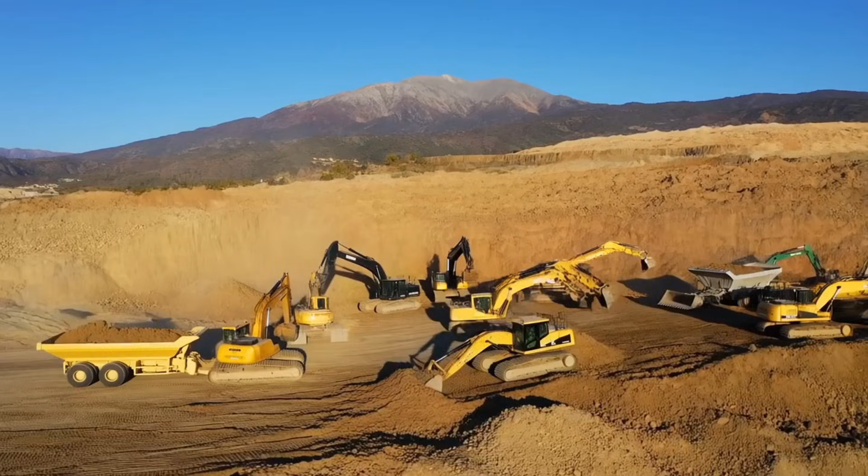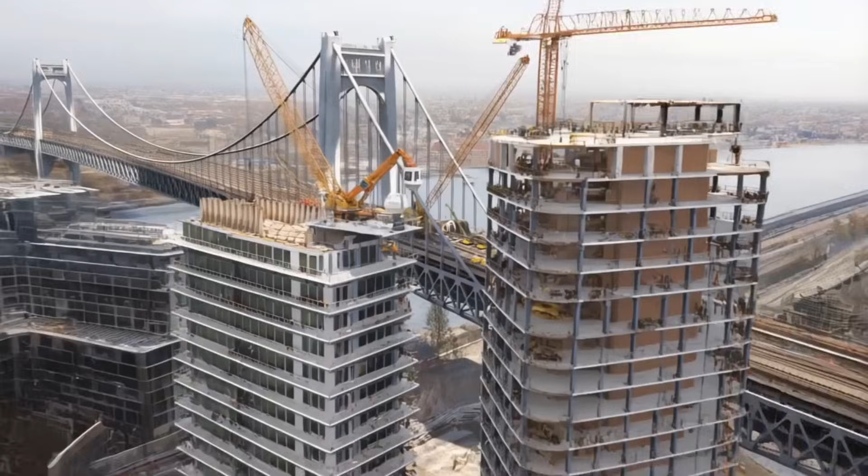Right now, someone is moving a mountain. Literally. And it's not even the craziest thing happening on this list. While you're watching this video, there are construction projects happening across the globe that make the pyramids look like a weekend DIY project. We're talking about structures so massive, so expensive, and so technically insane that they're redefining what humans can actually build. Some of them will change how entire continents trade. Fun times.

So buckle up. We're about to tour 8 mega projects that are either going to reshape civilization or become very, very expensive mistakes. Let's find out. Number 8.

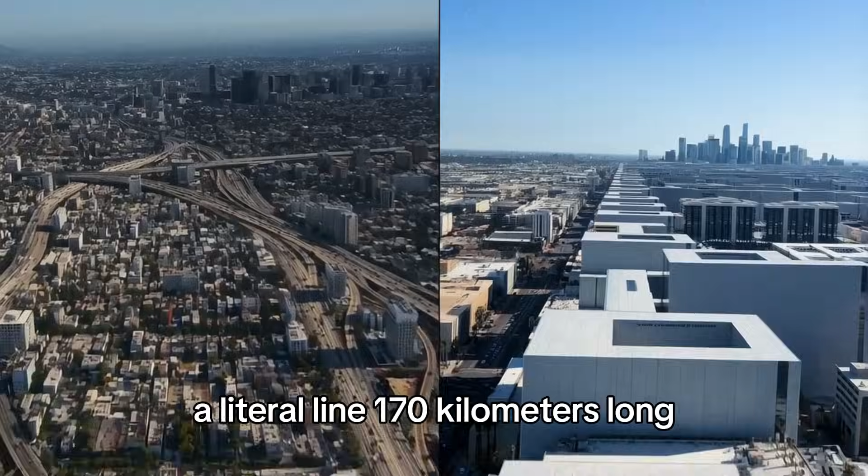Saudi Arabia. Imagine a city that's a straight line, not a sprawling mess like Los Angeles. A literal line, 170 kilometers long, 200 meters wide, and 500 meters tall. Two parallel mirrored skyscrapers running through the desert with everything you need sandwiched between them. That's the line. And yes, it sounds like someone pitched a concept from a sci-fi movie to a government with unlimited oil money.

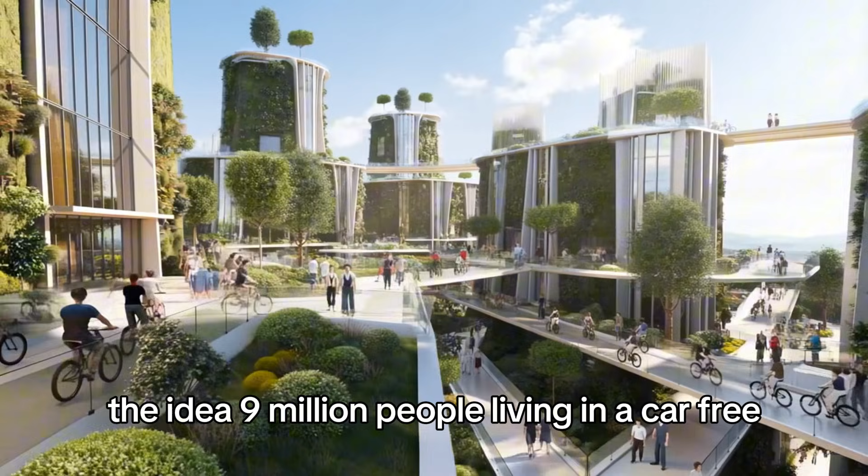Because that's basically what happened. Saudi Crown Prince Mohammed bin Salman unveiled this fever dream in 2021 as part of NEOM, his $500 billion attempt to diversify Saudi Arabia's economy away from oil. The idea? 9 million people living in a car-free, carbon-neutral megastructure where you can access everything you need within a 5-minute walk. High-speed rail underneath gets you from one end to the other in 20 minutes. The whole thing is powered by renewable energy and surrounded by nature reserves.

Sounds utopian, right? Here's where it gets wild. The line is being built in one of the harshest deserts on Earth, where summer temperatures regularly hit 45 degrees Celsius. The mirrored exterior is supposed to reflect heat, but engineers are basically asking, what could possibly go wrong with two 170-kilometer-long mirrors in the desert?

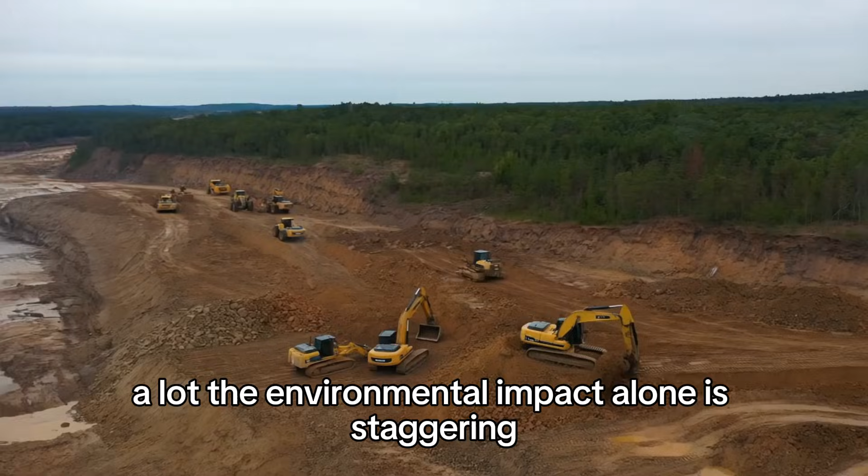Spoiler alert, a lot. The environmental impact alone is staggering. They're not building around the landscape, they're cutting straight through it. Mountains are being demolished, entire ecosystems are being relocated. And the local Howeitat tribe, let's just say their relocation hasn't been exactly voluntary. Human rights groups are having a field day with this one.

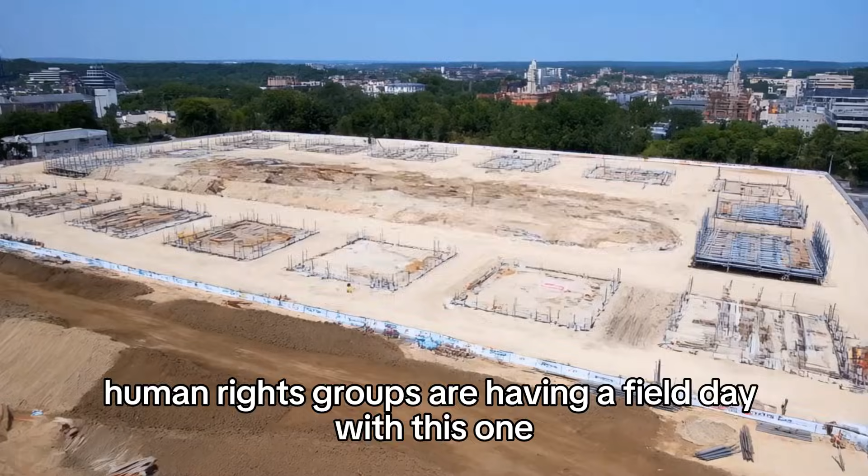Construction started in 2021, and they're aiming for the first section to be complete by 2030. That's right, they want to build a 170-kilometer-long vertical city in less than a decade. For context, it took New York City about 400 years to get to its current state. The line wants to do it in 9.

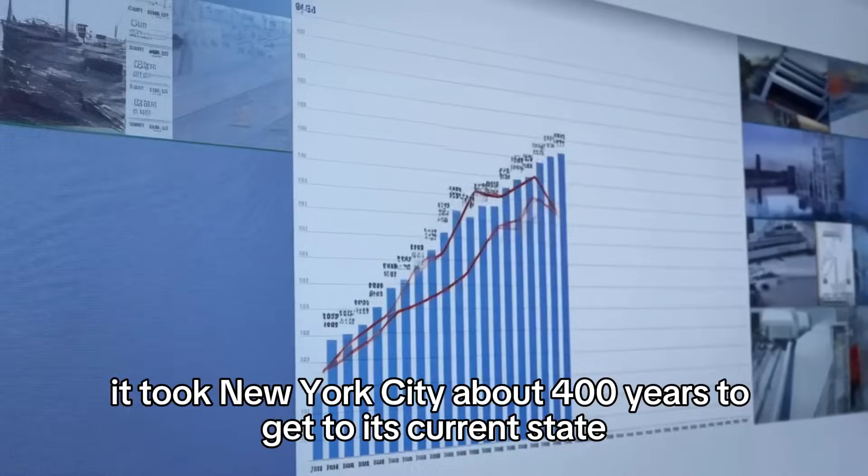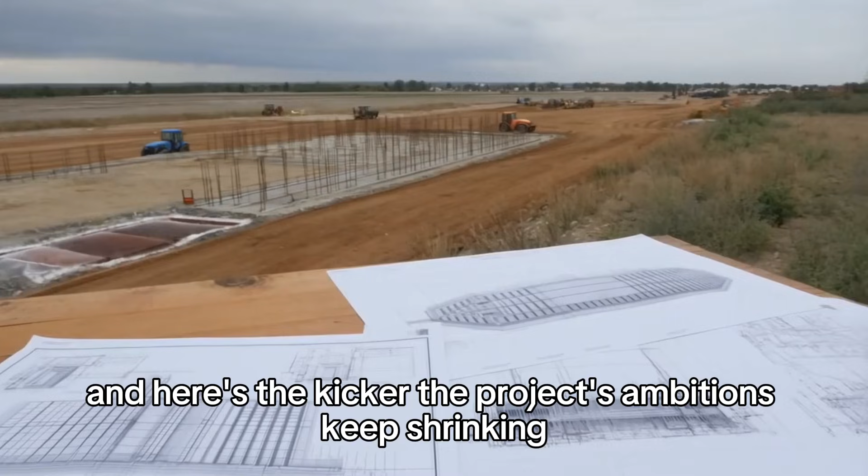The budget keeps climbing. Originally $500 billion, some estimates now put it closer to $1 trillion. That's more than the GDP of most countries. And here's the kicker, the project's ambitions keep shrinking. Recent reports suggest they might only complete 2.4 kilometers by 2030, not the full 170. That's like promising someone a Ferrari and delivering a skateboard.

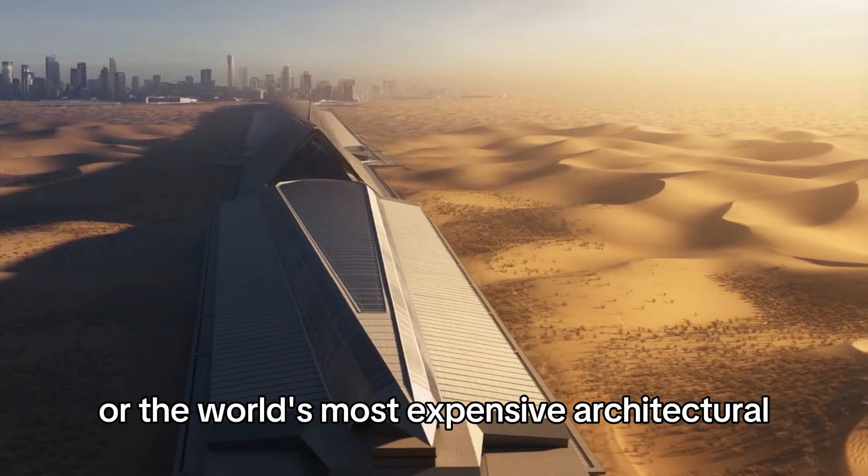Will it work? Ask me in 2030. The line is either the future of urban living or the world's most expensive architectural middle finger to common sense.

Number 7. The Grand Ethiopian Renaissance Dam. Let's head to Africa, where Ethiopia is building what will become the largest hydroelectric dam on the entire continent. The Grand Ethiopian Renaissance Dam, or GERD, sits on the Blue Nile in northwest Ethiopia. When it's finished, this thing will generate 5,150 megawatts of electricity. That's enough to power about 5 million homes.

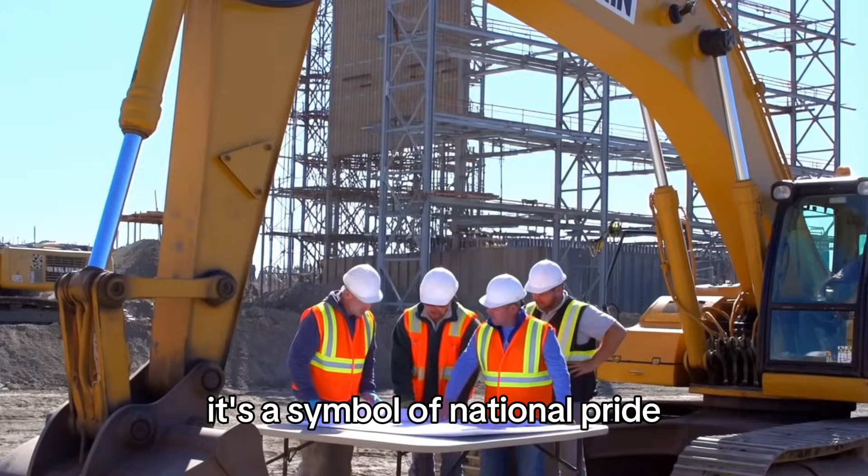For Ethiopia, this is huge, literally and figuratively. Around 44% of Ethiopia's population doesn't have electricity. This dam could change that. It's a symbol of national pride, economic development, and energy independence. They're building it with their own money, about $4.8 billion, making it one of the few mega projects in Africa that isn't drowning in foreign debt.

But here's where things get spicy. The dam sits on the Blue Nile, which eventually flows into Egypt. And Egypt is not happy about this. Like, really not happy. The Blue Nile provides about 85% of Egypt's water supply. So when Ethiopia started filling the dam's reservoir in 2020, essentially reducing downstream flow, Cairo went into panic mode.

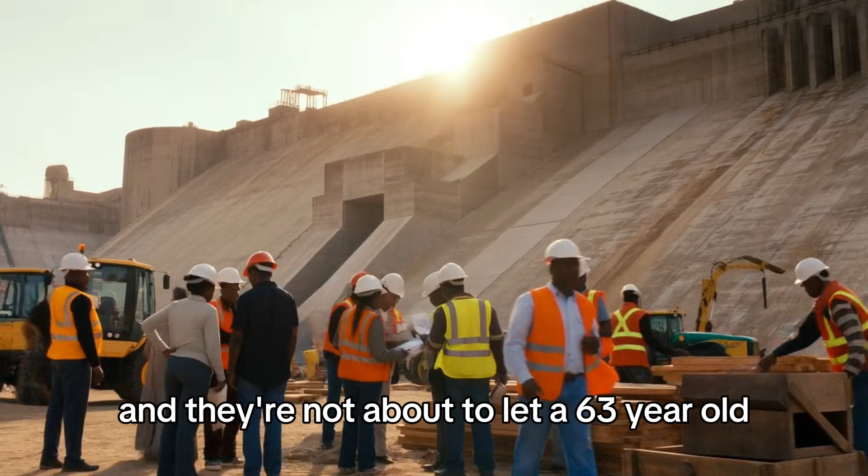Egypt's position is simple. They've had water rights to the Nile since a 1959 agreement with Sudan. Any major project on the Nile needs their approval. Ethiopia's position is equally simple. That 1959 agreement was made when they were never consulted, and they're not about to let a 63-year-old colonial-era treaty dictate their development. Sudan is caught in the middle, sometimes supporting Ethiopia, sometimes siding with Egypt, mostly just hoping nobody decides to solve this with tanks.

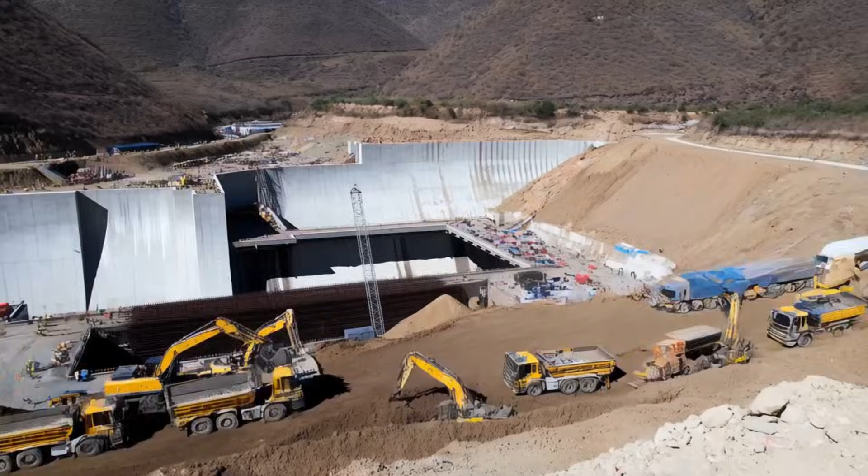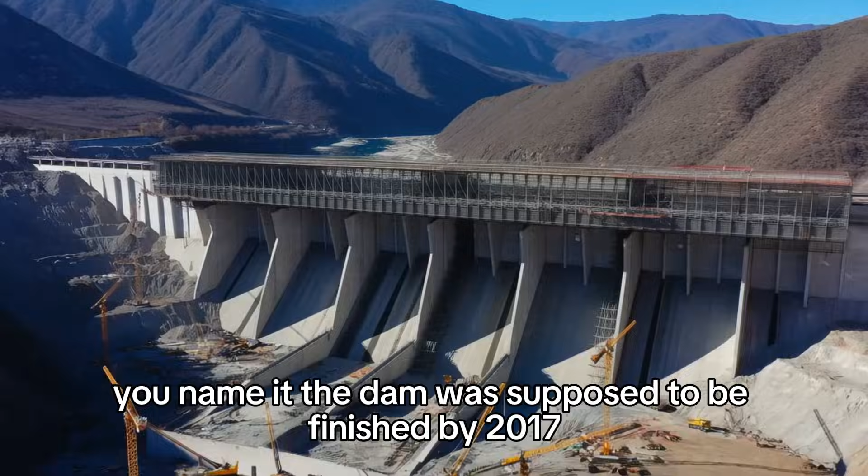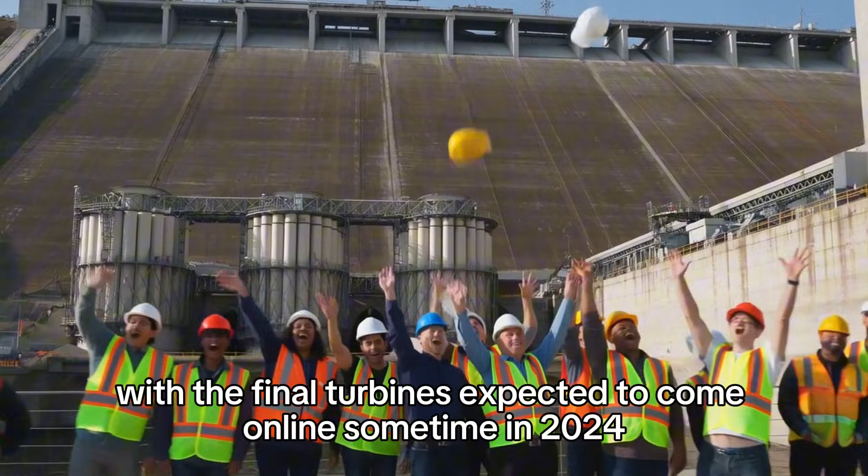Construction started in 2011 and has faced every obstacle imaginable: technical delays, political disputes, assassination attempts on engineers, you name it. The dam was supposed to be finished by 2017, then 2023. As of now, it's about 95% complete, with the final turbines expected to come online sometime in 2024 or 2025. Maybe. Possibly. If everyone plays nice.

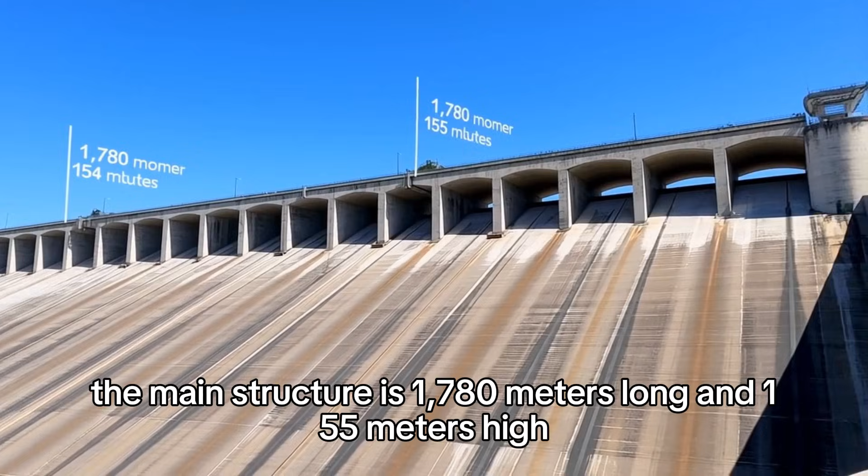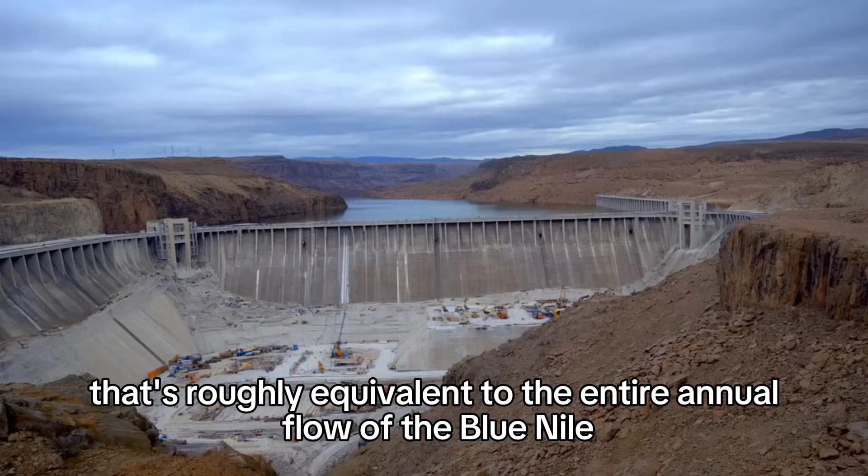The dam itself is massive. The main structure is 1,780 meters long and 155 meters high. The reservoir behind it, when full, will hold 74 billion cubic meters of water. That's roughly equivalent to the entire annual flow of the Blue Nile. Filling it takes 3 to 7 years, depending on who you ask and how much they want to terrify downstream neighbors.

The international community is watching this closely because GERD could set a precedent. If Ethiopia succeeds in asserting its water rights over colonial-era treaties, other upstream nations might get ideas. There are 11 countries that share the Nile Basin. Things could get complicated fast.

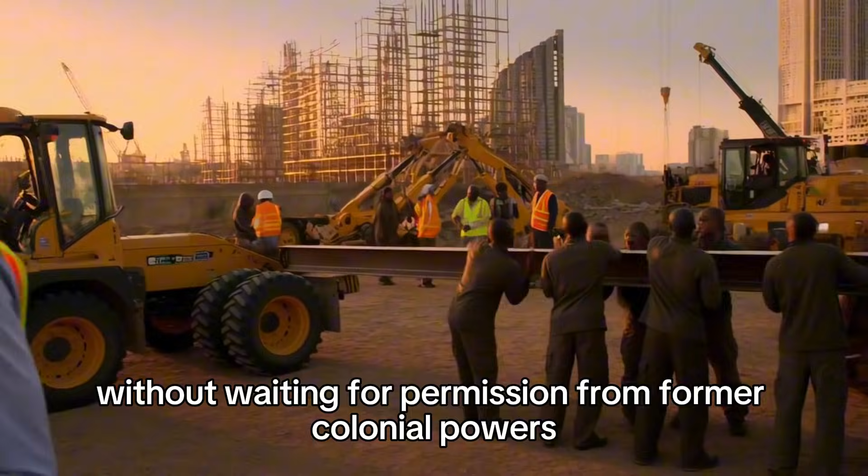But for Ethiopia, this isn't just about electricity. It's about sovereignty, dignity, and proving that African nations can build world-class infrastructure without waiting for permission from former colonial powers. Whether that message comes at the cost of regional stability is the multi-billion-dollar question.

Number 6. Istanbul Grand Airport. Turkey decided that having one of the world's busiest airports wasn't enough. So they built a new one. And they didn't just build a new airport. They built the airport. The one that makes other airports look like regional bus stations.

Istanbul Grand Airport, also called Istanbul Airport, because apparently Grand was too humble, opened in 2018, but is still under construction. This beast will have 6 runways and handle 200 million passengers a year. To put that in perspective, Atlanta's Hartsfield-Jackson, currently the world's busiest airport, handles about 107 million passengers. Istanbul wants to almost double that.

The airport sits on the European side of Istanbul, about 35 kilometers north of the city center. The location was chosen specifically because Turkey wants to be the global hub connecting Europe, Asia, and Africa. Istanbul's geographic position is perfect for this. You can fly from here to anywhere in the world, and most of those destinations are within a few hours.

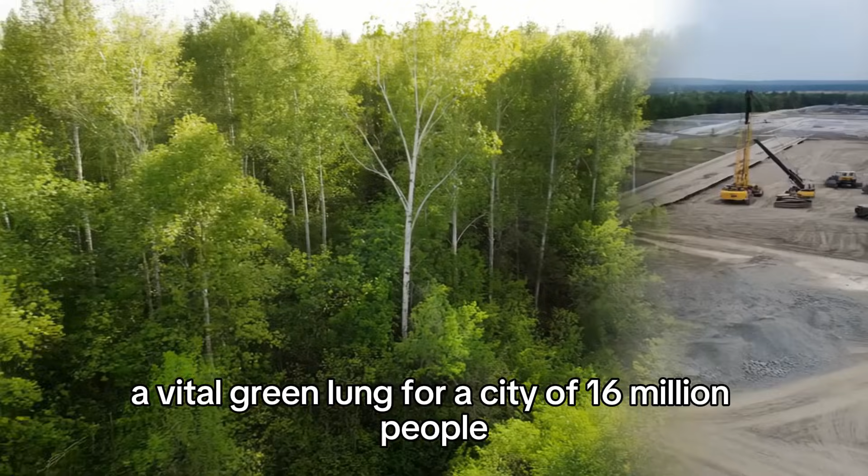But building this required some serious geographical gymnastics. The northern forests of Istanbul, a vital green lung for a city of 16 million people, got turned into tarmac and terminals. Environmentalists were not pleased. Protests erupted. The government responded with the construction equivalent of too late now.

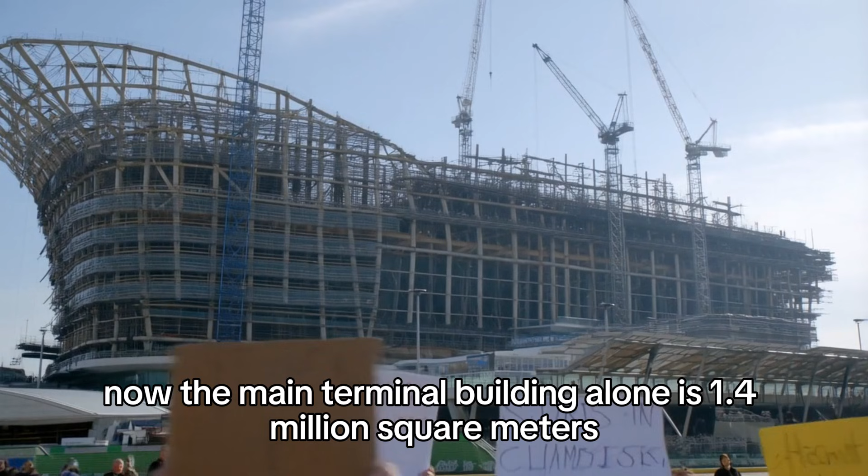The main terminal building alone is 1.4 million square meters. That's bigger than any other airport terminal in the world. It's so big that they had to build an internal train system just to get passengers from one end to the other. Walking from the farthest gate to the exit could take 30 minutes.

Pack snacks. Turkey invested about $12 billion into this project, which sounds like a lot, until you realize they're expecting it to contribute $50 billion annually to the Turkish economy once fully operational. The logic is simple. Control the travel hub.

Control the money. Dubai did it. Singapore did it. Turkey wants in on that action. Here's the weird part. Istanbul already had 2 perfectly functional international airports, Ataturk and Sabiha Gökçen. Ataturk Airport, which was one of Europe's busiest, got shut down when Istanbul Grand Airport opened. Just closed. Now it mostly sits empty, a monument to the phrase go big or go home.

The airport also features some truly bonkers amenities. There's a museum, a library, prayer rooms for multiple religions, sleeping pods, a health clinic, and enough shopping to make Dubai Mall jealous. It's less an airport and more a small city that happens to have runways attached.

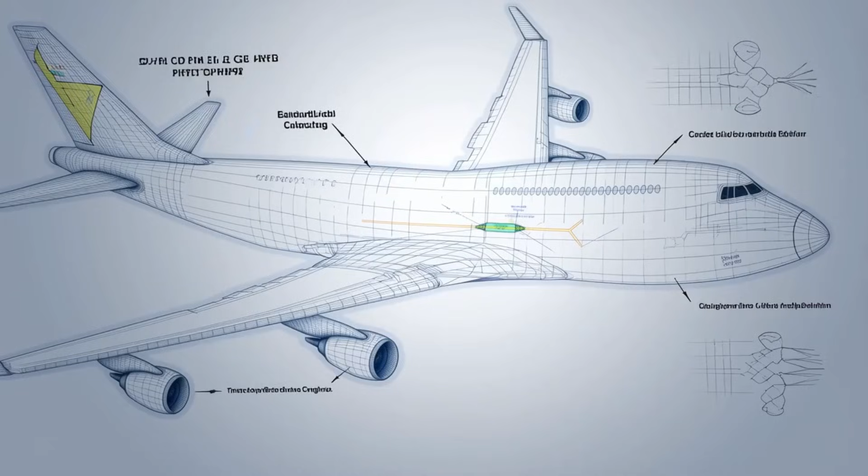Will it hit 200 million passengers? That depends on whether Turkey can maintain political stability, keep its economy from imploding, and convince airlines that Istanbul is the place to route everything. The first 2 are question marks. The third is looking promising.

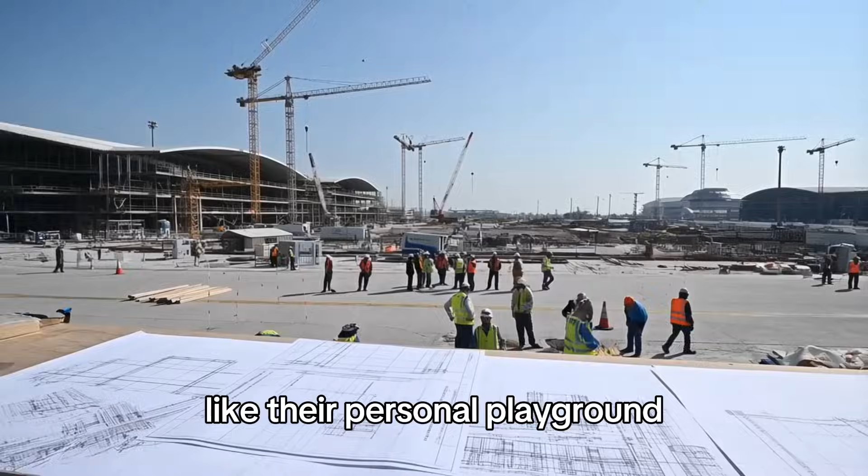Turkish Airlines is already one of the world's largest carriers, and they're treating Istanbul Grand Airport like their personal playground. Construction continues on the remaining phases, with the full build-out scheduled for 2028. If it works, Turkey becomes the undisputed travel hub of the Eastern Hemisphere.

If it doesn't, they've got a really big empty building in the middle of what used to be a forest.

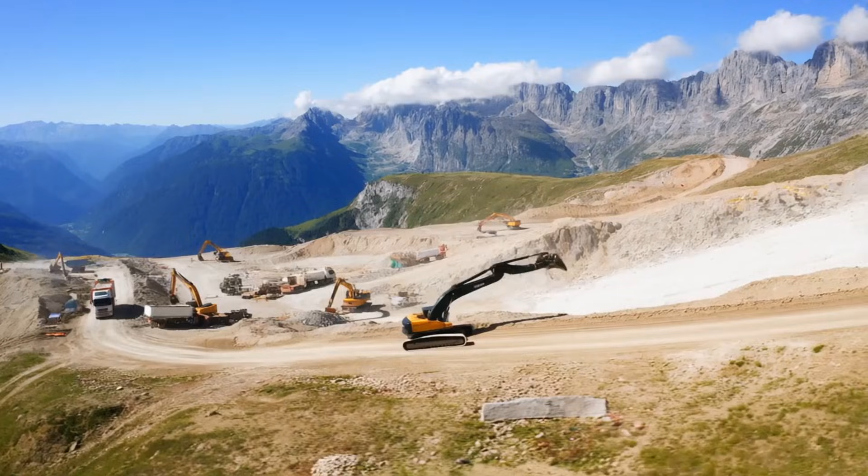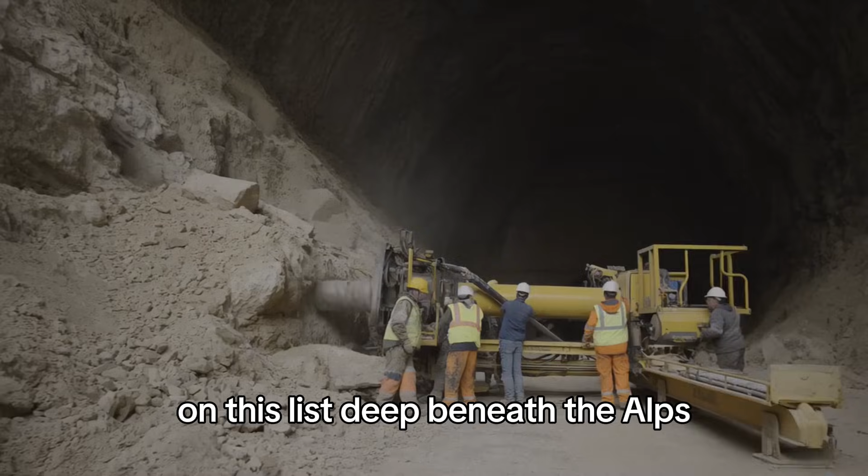Number 5, Brenner Base Tunnel, Austria and Italy. It might actually be the most impressive feat of engineering on this list. Deep beneath the Alps, Austria and Italy are drilling the world's longest underground railway tunnel. The Brenner Base Tunnel will run for 64 kilometers straight through the mountains, connecting Innsbruck, Austria with Fortezza, Italy. Assuming they don't hit any more underground lakes or Roman ruins, it will be the longest railway tunnel in the world, beating out the current champion, Switzerland's Gotthard Base Tunnel, by about 7 kilometers.

Here's why this matters. Right now, about 2.5 million trucks cross the Alps every year, mostly through the Brenner Pass, which is the lowest and easiest crossing point. Those trucks create traffic nightmares, spew pollution into pristine alpine air, and occasionally cause accidents that shut down the entire route. The tunnel will shift most of that freight onto trains, cutting transit times and emissions.

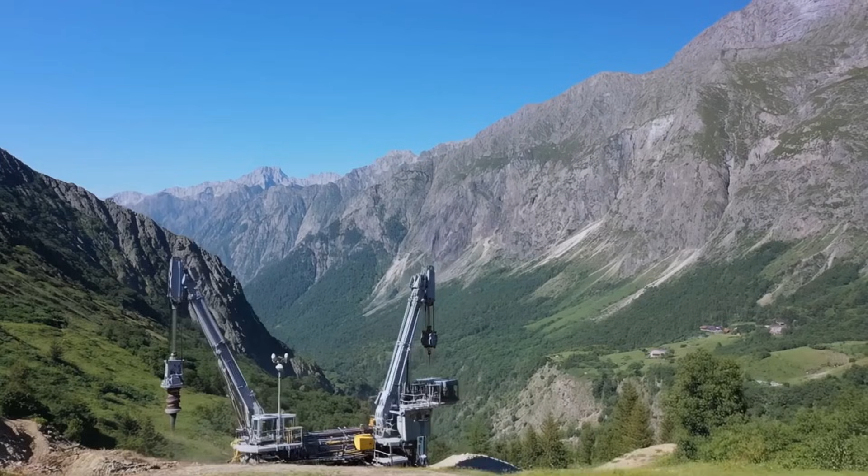But drilling through mountains is hard. Really hard. The Alps are geologically complicated, a messy collision zone where the African and European tectonic plates are still shoving into each other. That means unpredictable rock formations, underground water sources, and constant risk of cave-ins.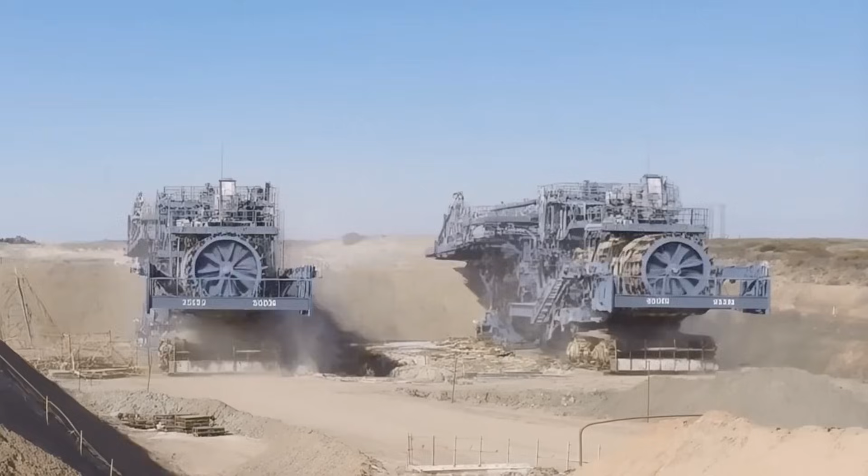They started drilling in 2007. Two massive tunnel boring machines, affectionately named after saints, because if you're drilling through a mountain, you need all the divine help you can get, are working from both ends. They meet in the middle. Hopefully. If the math is wrong, they'll have two tunnels that miss each other, which would be embarrassing and expensive.

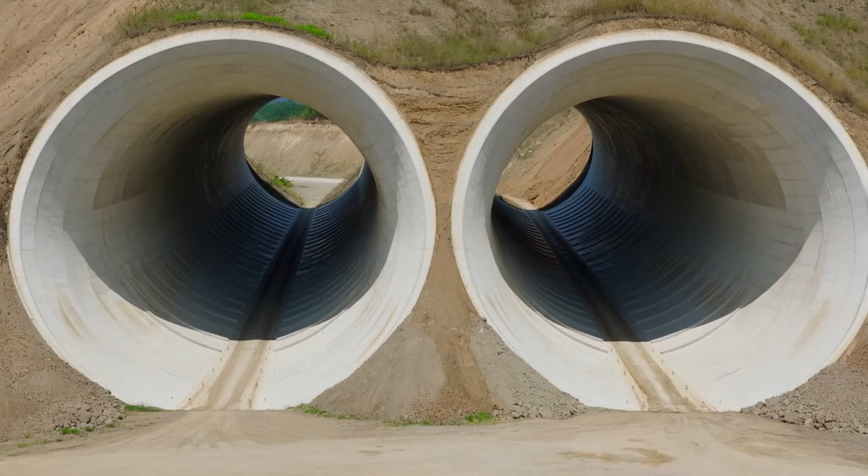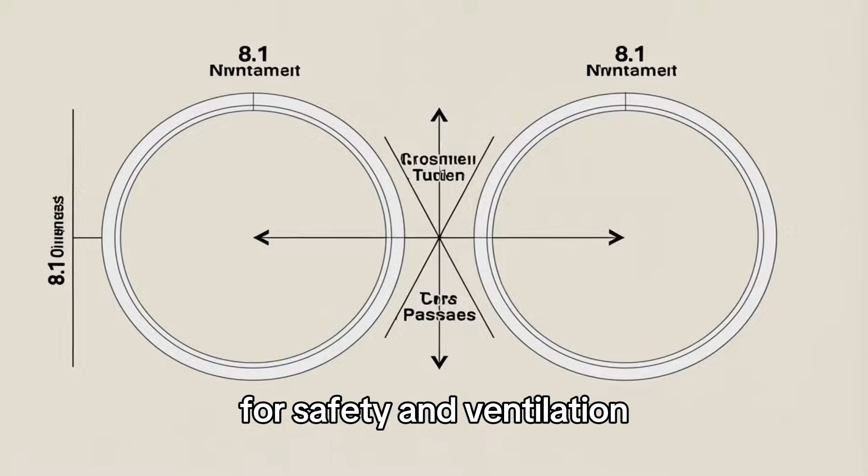The tunnel isn't just one tube. It's actually two parallel tunnels, each 8.1 meters in diameter, connected every 333 meters by cross passages for safety and ventilation. There's also a smaller exploratory tunnel that runs alongside, used for drainage and maintenance. In total, they're excavating about 230 kilometers of underground space.

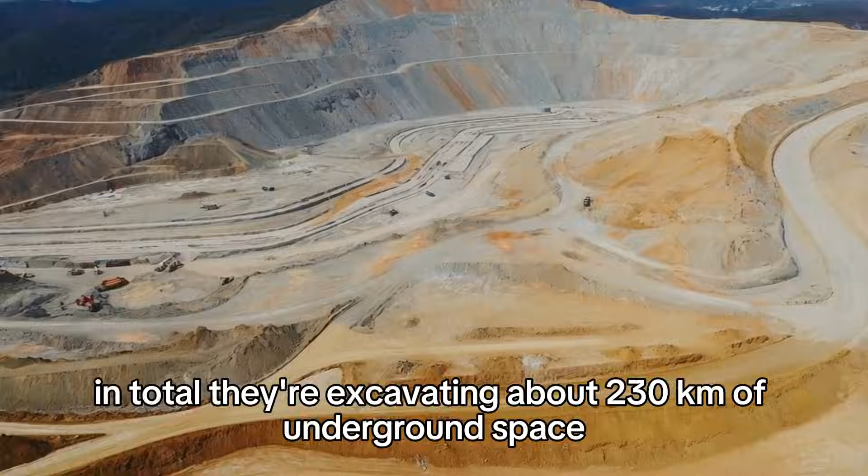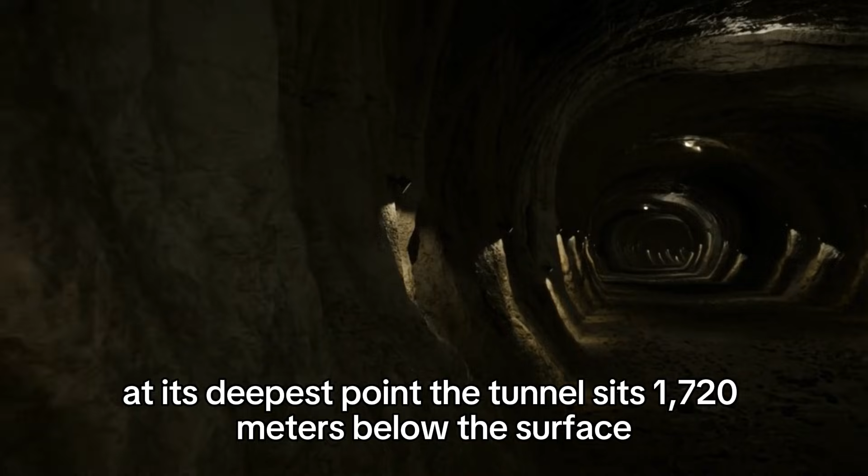The cost? Around 10 billion euros, split between Austria and Italy. That's surprisingly reasonable for a project of this scale, mainly because both countries are really motivated to stop having trucks destroy their mountains. At its deepest point, the tunnel sits 1,720 meters below the surface. The rock pressure at that depth is enormous. The temperature can hit 40 degrees Celsius. Workers have to deal with heat, dust, and the knowledge that millions of tons of mountain are sitting above their heads. It's not a job for the claustrophobic.

Water is a constant enemy. The Alps are full of underground aquifers, and hitting one while drilling can flood the tunnel in minutes. In 2011, they struck a massive water source that delayed construction by 2 years. The water table in some alpine villages dropped noticeably because the tunnel was accidentally draining their groundwater. Oops! But the tunnel is also a masterpiece of precision.

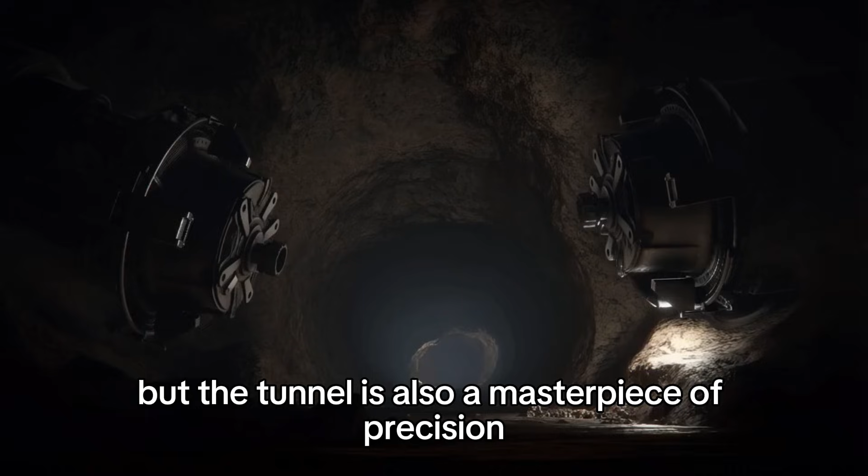When the two boring machines finally meet in the middle, they need to line up within a few centimeters. Considering they're drilling blind through dozens of kilometers of rock, that's like threading a needle while blindfolded and wearing oven mitts.

Environmental groups love this project, which is rare for mega infrastructure. Moving freight from trucks to trains will cut CO2 emissions by about 60%. The Alps will get quieter, air quality will improve. Wildlife corridors will be less disrupted. It's one of the few mega projects where environmentalists and engineers actually agree.

When it opens in 2032, trains will zip through the Alps at up to 250 kilometers per hour. The journey from Munich to Verona will take 2 hours instead of 5. And the Brenner Pass, which has been the main route through the Alps for literally thousands of years, will finally get a break.

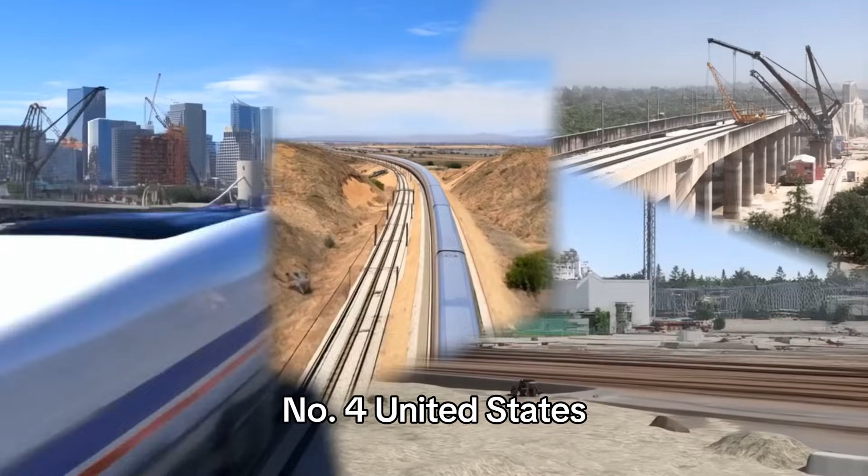Number 4, United States. Speaking of trains, let's talk about the train project that refuses to die, no matter how hard America tries to kill it. If it ever gets built, it'll connect San Francisco to Los Angeles, with trains running at 350 kilometers per hour. The trip will take under 3 hours, compared to the current 6-hour drive or 1-hour flight, plus 2 hours of airport security theater.

This is supposed to be America's answer to Japan's Shinkansen or France's TGV, a modern, sleek, high-speed rail system that proves the US can still build big infrastructure. Except it's been an absolute disaster from day one.

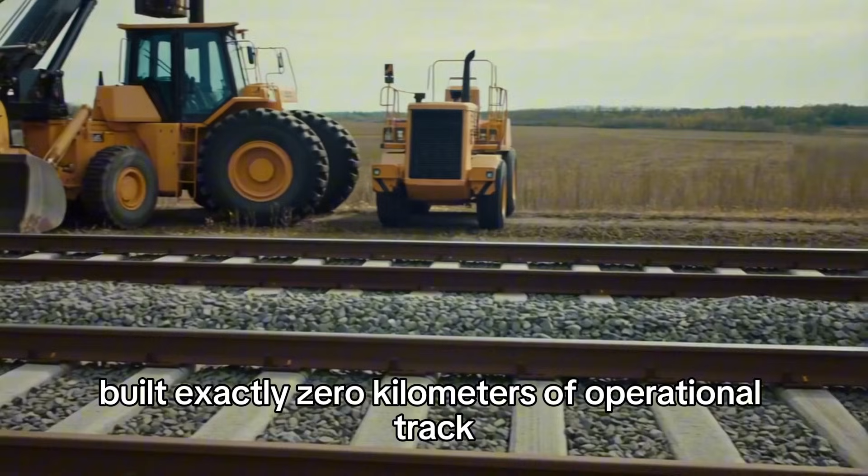Construction started in 2015. The original budget was $33 billion. The estimated completion date was 2020. As of 2024, they've spent over $10 billion, built exactly 0 kilometers of operational track, and the new cost estimate is somewhere between $90 and $128 billion, depending on who's doing the math and how much they're trying to sugarcoat it.

Here's what went wrong. Everything. The route planning was a political nightmare, with every city demanding the train stop at their town, turning a simple San Francisco to Los Angeles route into a zigzagging mess. Land acquisition became a legal quagmire, with property owners suing left and right.

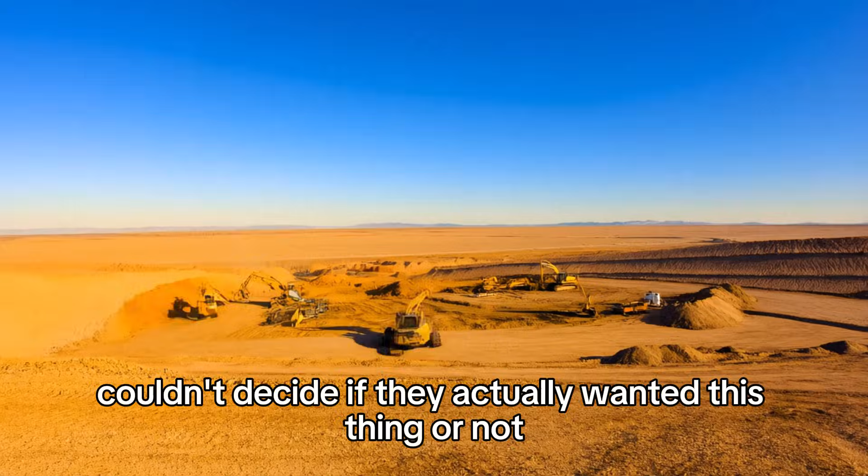Environmental reviews took years. Labor costs exploded, and California's political establishment couldn't decide if they actually wanted this thing or not. The current plan is to build a scaled-back initial segment in the Central Valley, connecting Merced to Bakersfield. Let me repeat that. They're spending billions of dollars to connect two cities that nobody needs to travel between at high speed.

It's like building a Ferrari that only drives in your driveway. The idea is that once this segment is operational, it'll prove the concept works, and funding will magically appear to extend it to San Francisco and Los Angeles. That's optimistic. That's California lottery winner levels of optimistic.

If California can pull this off, it would be transformative. Los Angeles to San Francisco is one of the most traveled routes in America. About 40 million trips happen on that corridor every year. A functional high-speed rail system could take thousands of cars off the road, reduce emissions, and create a model for other U.S. cities to follow.

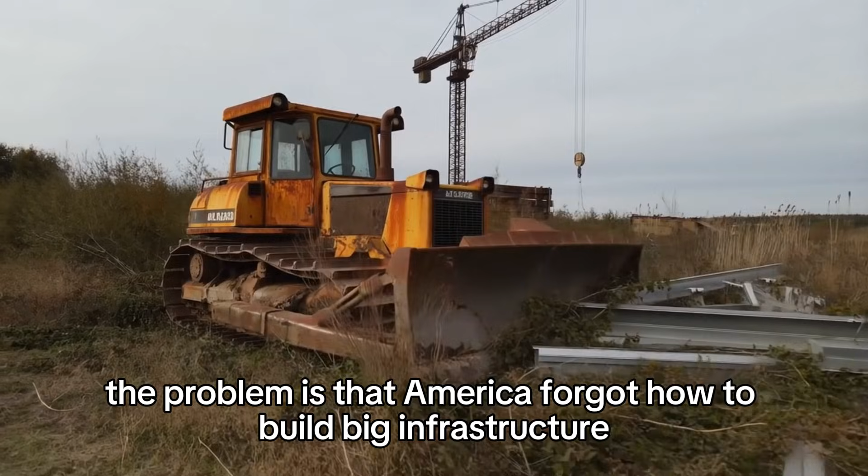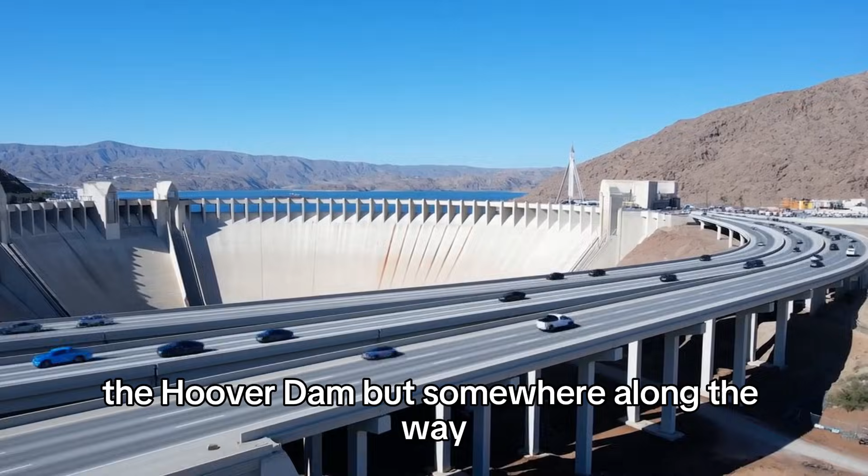The problem is that America forgot how to build big infrastructure. We used to be good at this. We built the Transcontinental Railroad, the Interstate Highway System, the Hoover Dam. But somewhere along the way, we got addicted to bureaucracy, NIMBY lawsuits, and cost overruns that would make a defense contractor blush. California high-speed rail is a test.

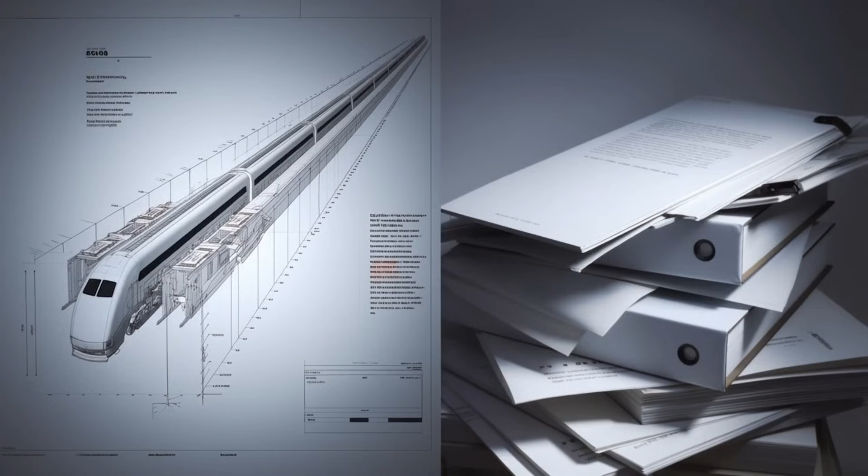Can America still build something hard? Or are we going to spend $100 billion and end up with nothing but studies, lawsuits, and a very expensive train that connects Merced to Bakersfield?

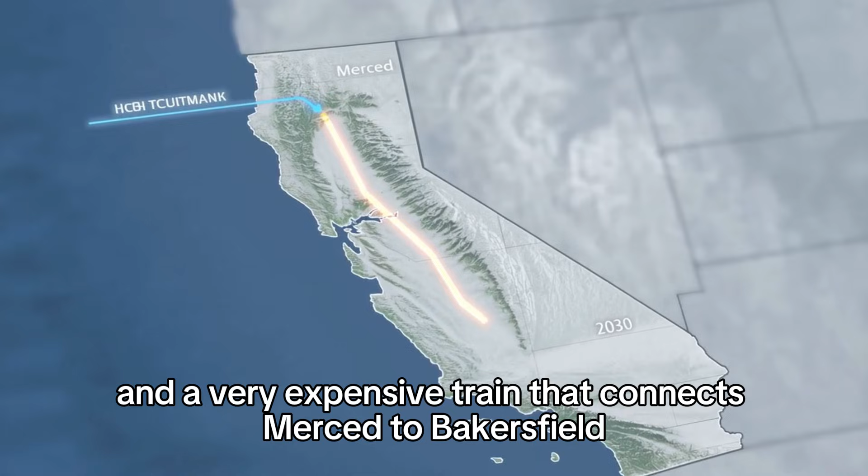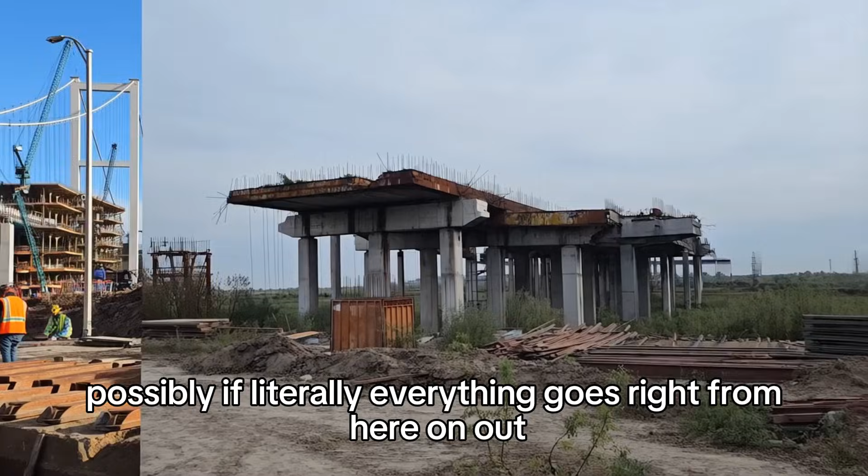The current estimate says the first operational segment might open by 2030. Maybe. Possibly. If literally everything goes right from here on out, which given the track record seems unlikely. But hey, at least we're trying. That's gotta count for something, right?

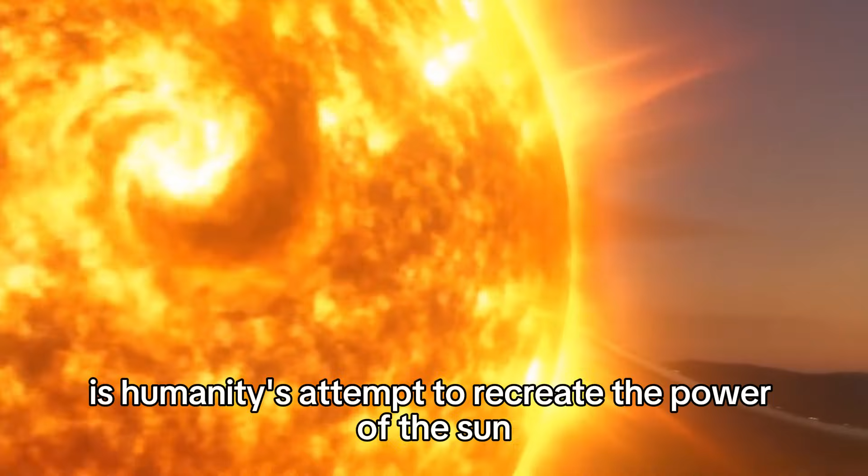Number 3. ITER fusion reactor, France. Now we're getting into the truly insane category. The International Thermonuclear Experimental Reactor is humanity's attempt to recreate the power of the sun in a giant metal donut in southern France. If it works, and that's a big if, ITER will prove that nuclear fusion, the same process that powers stars, can be harnessed for clean, virtually unlimited energy.

If it doesn't work, we've spent about $25 billion building the world's most expensive science experiment. ITER is a collaboration between 35 countries, including the US, China, Russia, Japan, India, South Korea, and the European Union. That's right. Countries that can barely agree on anything are somehow cooperating to build a fusion reactor. It's either a testament to human ambition or proof that scientists are better at diplomacy than politicians.

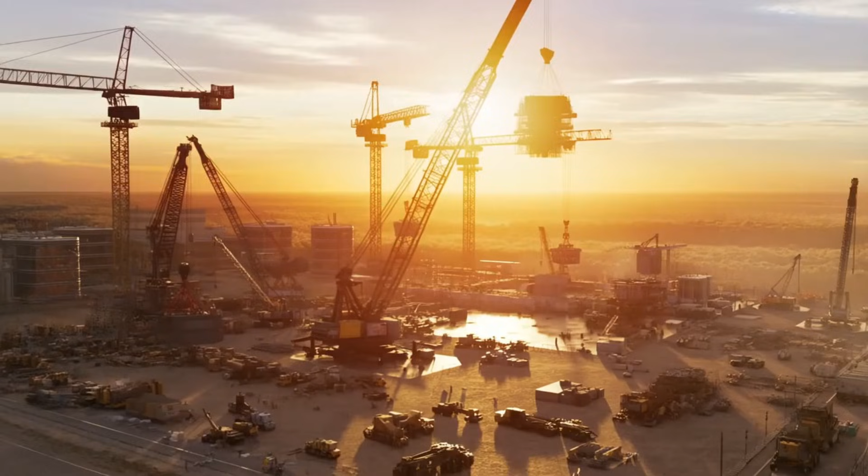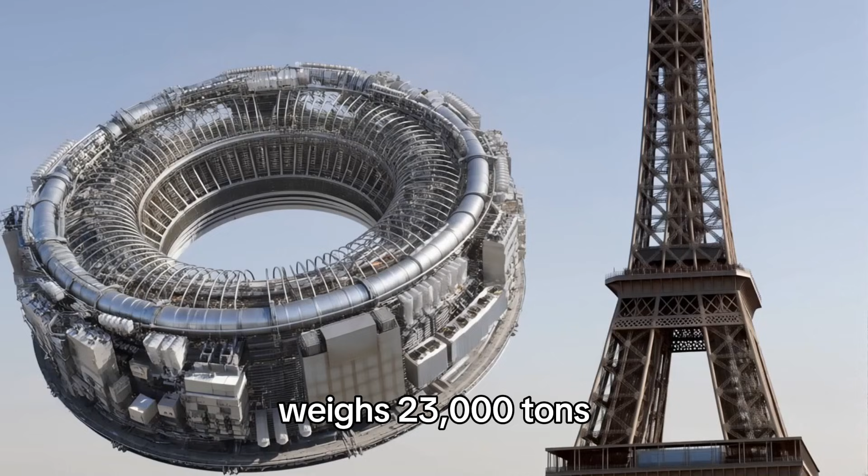Construction started in 2010 on a site in Cadarache, France. The reactor itself is massive. The tokamak, the giant donut-shaped chamber where fusion happens, weighs 23,000 tons. That's about 3 Eiffel Towers. The entire facility, including all the support systems, magnets, and cooling infrastructure, covers 180 hectares.

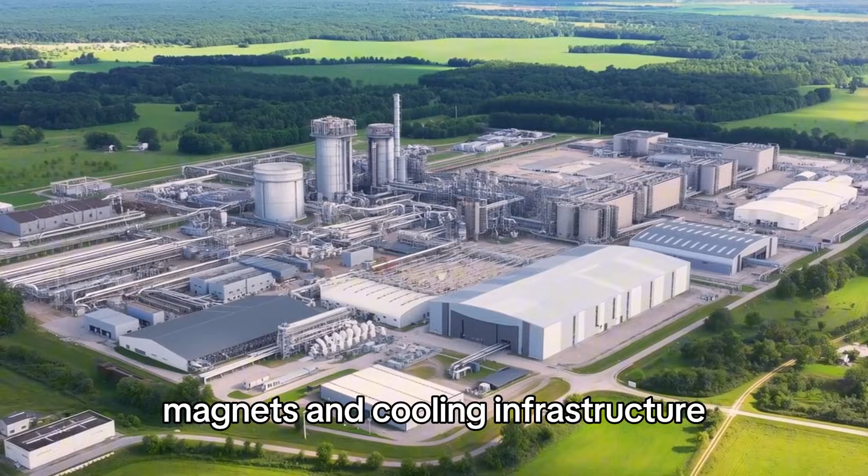Here's how fusion works, in terms simple enough that I won't get yelled at by physicists. You take hydrogen isotopes, heat them to 150 million degrees Celsius, 10 times hotter than the core of the sun, and smash them together with such force that they fuse into helium, releasing massive amounts of energy. Easy, right? The challenges are absurd.

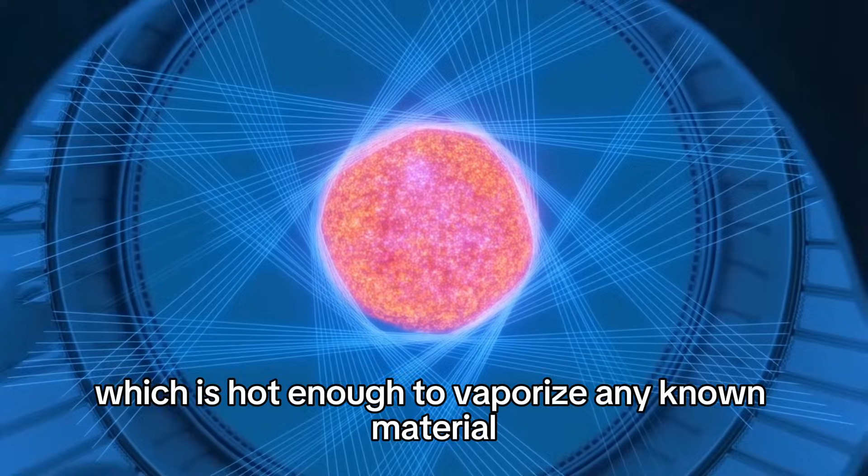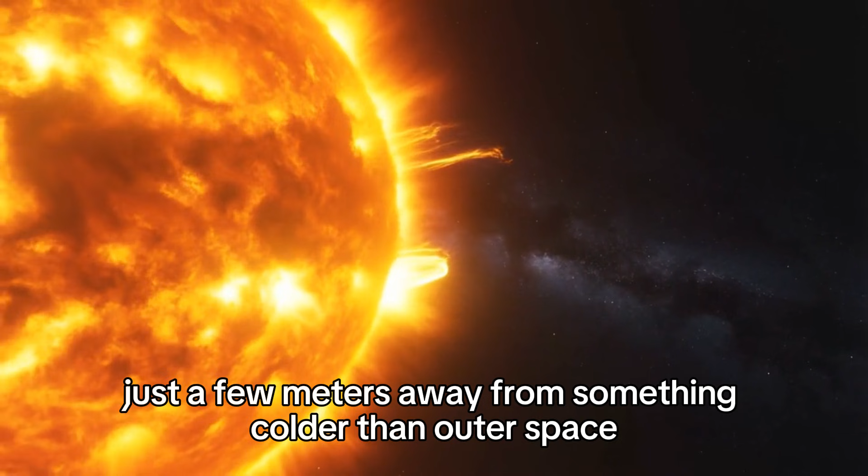You need to contain plasma at 150 million degrees, which is hot enough to vaporize any known material. So instead of physical walls, ITER uses magnetic fields to suspend the plasma in the middle of the chamber. The magnets are superconducting, meaning they need to be cooled to minus 269 degrees Celsius. So you've got something hotter than the sun just a few meters away from something colder than outer space. What could go wrong? Everything has to be perfect. The magnetic fields need to be precise to within millimeters.

The plasma has to stay stable, which is like trying to hold Jell-O in a magnetic bottle. Any instability and the whole reaction collapses. Or worse, the plasma touches the wall, and you've just destroyed $1 billion worth of equipment.

ITER's goal is to achieve Q greater than 10. That means for every unit of energy put in, the reactor produces 10 units of energy out. If they can do that, fusion power becomes viable. Not immediately practical, but viable. It proves the concept works.

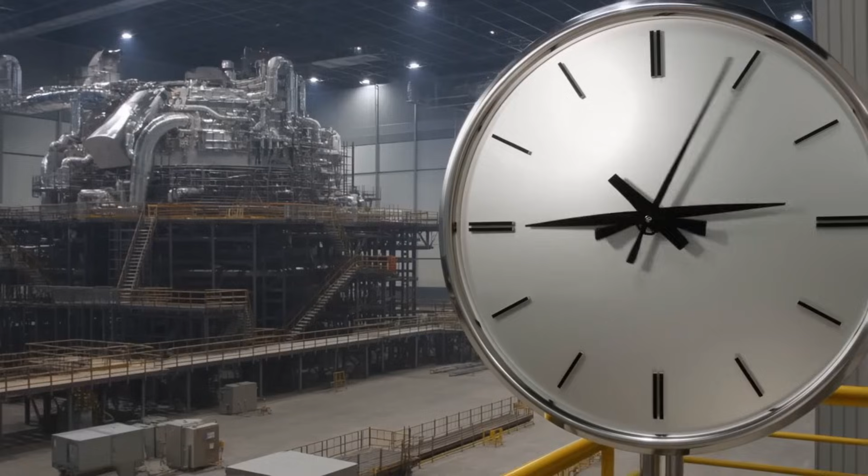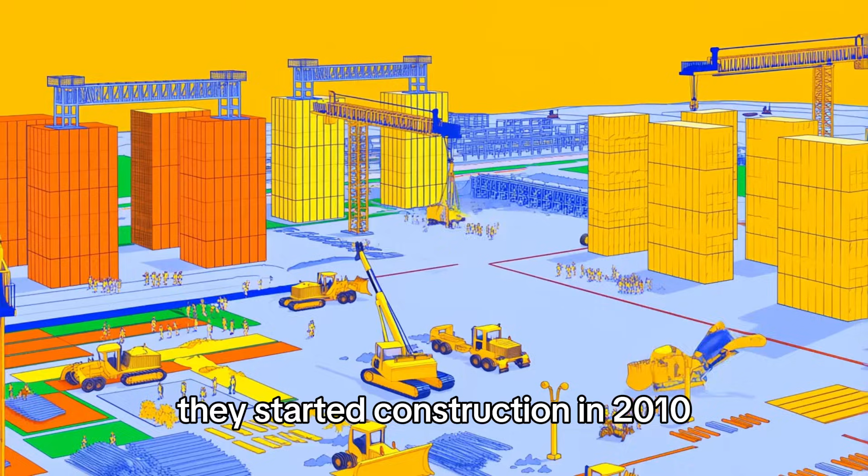The timeline has been a moving target. Originally, ITER was supposed to achieve first plasma by 2016, then 2020, then 2025. The current estimate is 2039 for full fusion operations. That's not a typo, 2039. They started construction in 2010. That's a 29-year build time for a science experiment.

The cost has also, surprise surprise, exploded. Initial estimates were around $5 billion. Current estimates are closer to $25 billion, though some analysts think the final cost could hit $65 billion when you factor in all the delays and overruns.

But if it works, if ITER proves fusion is possible, we're talking about a new era of energy. Fusion produces no greenhouse gases, no long-lived radioactive waste, and uses fuel that's abundant and cheap. There's enough deuterium in Earth's oceans to power humanity for millions of years. That's the dream. The reality is that we're still decades away from commercial fusion power, even if ITER succeeds.

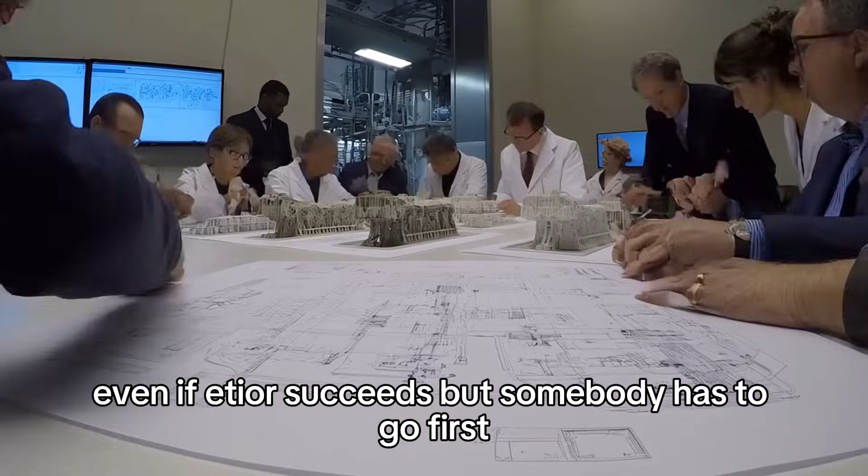But somebody has to go first. Somebody has to prove it can be done. And if it fails, well, at least we'll have built a really impressive metal donut in France.

Number 2: Beijing Daxing International Airport, China.

You thought Turkey went big with their airport? Hold my tea. Beijing Daxing International Airport, which opened in 2019, is designed to handle 100 million passengers a year by 2025, with plans to expand to 200 million by 2040. It's the largest single-building airport terminal in the world, covering 700,000 square meters of floor space. The design is bonkers. British-Iraqi architect Zaha Hadid created a starfish-shaped terminal with 6 flowing concentric rings that look like something out of a sci-fi movie.

The goal was to minimize walking distances. No gate is more than 600 meters from the center, which means you can get from security to your gate in about 8 minutes. Compare that to Beijing Capital Airport, where you might need 20 minutes and a Sherpa.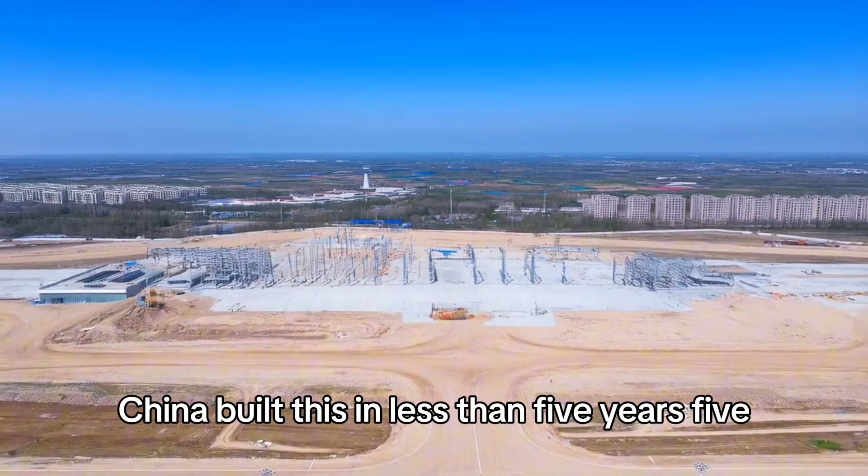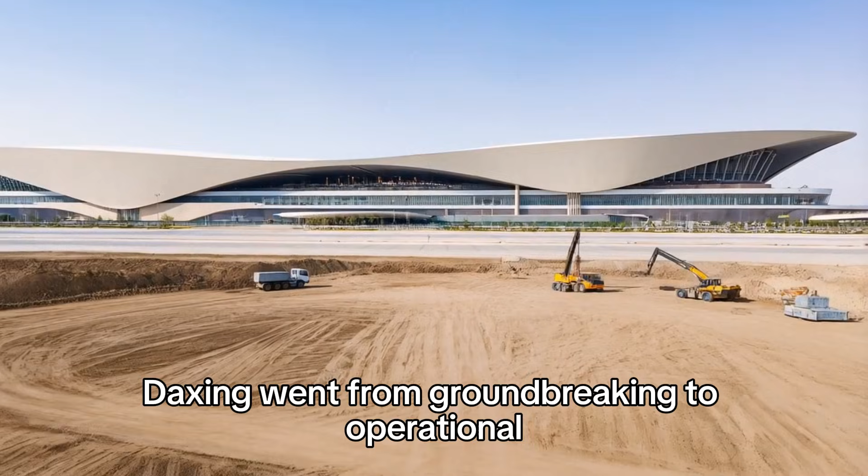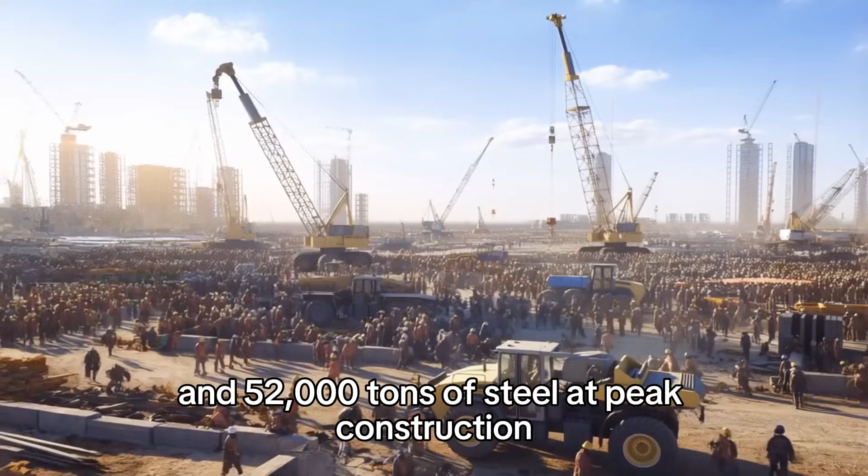China built this in less than 5 years. For context, Berlin's Brandenburg Airport took 14 years and still had problems when it opened. Daxing went from groundbreaking to operational in the time it takes most countries to complete environmental impact studies. The construction involved 1.6 million cubic meters of concrete and 52,000 tons of steel. At peak construction, over 50,000 workers were on site. They worked in shifts, 24 hours a day, 7 days a week.

The Chinese approach to mega projects is simple. Throw unlimited money, unlimited workers, and limited concern for anything that might slow things down at the problem. The airport sits 46 kilometers south of Beijing, connected to the city by a high-speed rail line that makes the journey in 20 minutes. Because China doesn't just build airports, they build entire transportation ecosystems.

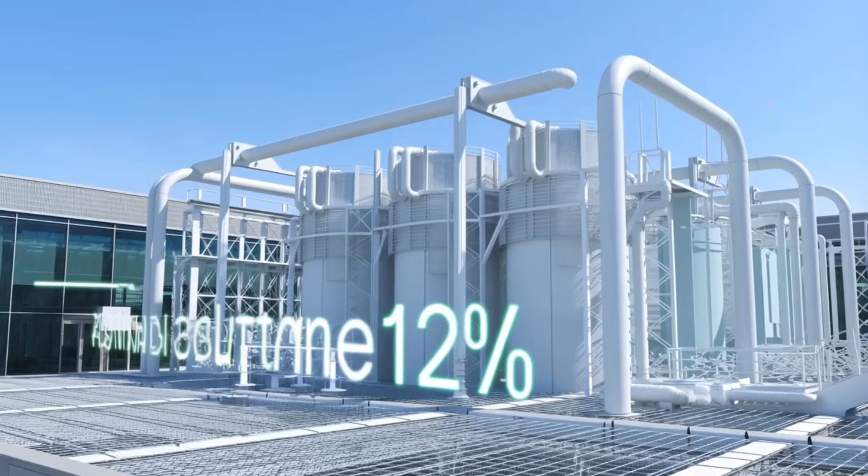The price tag? About $17 billion for the airport and $11 billion for the supporting infrastructure. That's $28 billion total, and China considers that a bargain.

Why did Beijing need another airport? Because Beijing Capital Airport was bursting at the seams. It's the second busiest airport in the world, handling over 100 million passengers a year, and it was designed for 80 million. The delays were legendary, the congestion was unbearable, so China did what China does. They built a bigger one.

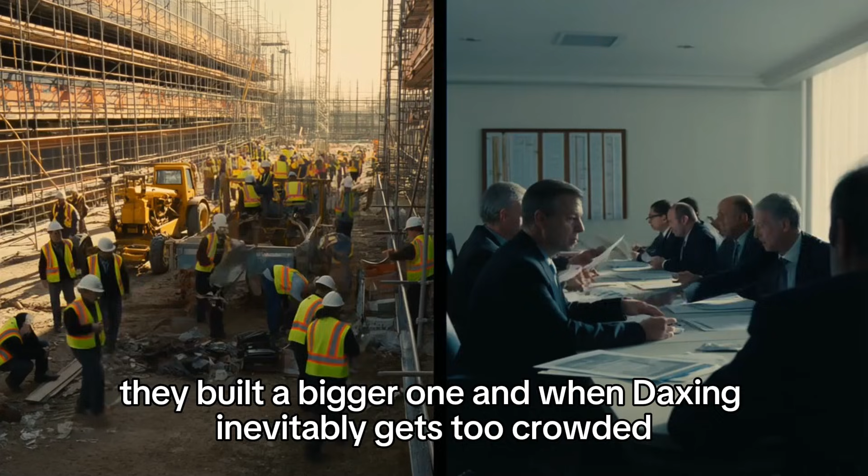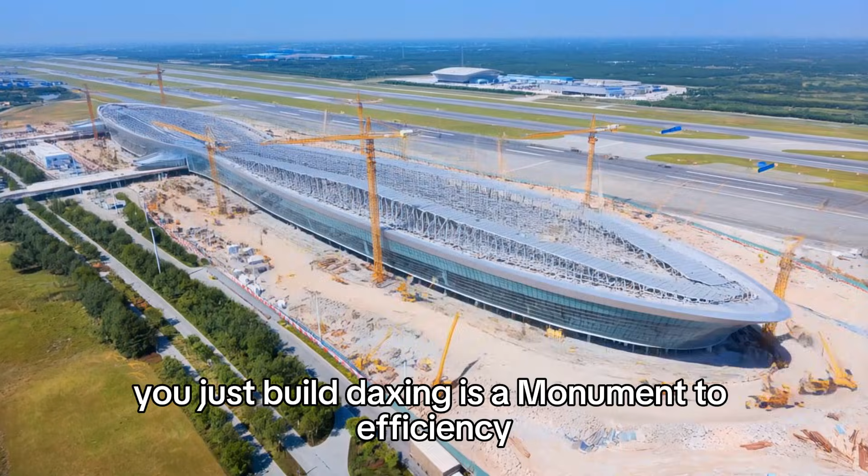And when Daxing inevitably gets too crowded, they'll probably build another one. That's the advantage of not having to worry about things like environmental lawsuits, community input, or lengthy democratic processes. You just build. Daxing is a monument to efficiency, ambition, and the idea that if you have enough concrete and political will, you can build anything.

It's also a middle finger to anyone who thinks airports have to be soul-crushing nightmares of endless corridors and overpriced food courts. Will it change global air travel? Probably not, but it definitely makes a statement. And that statement is, we're China. We build stuff.

Number 1, the North-South Transport Corridor, Eurasia. Let's end with a project that most people have never heard of but might actually reshape global trade for the next century. The North-South Transport Corridor, or NSTC, is a multimodal transportation network connecting India to Russia via Iran and the Caspian Sea. It includes railways, highways, and shipping routes designed to move cargo between South Asia, Central Asia, and Europe faster and cheaper than existing routes.

Why does this matter? Because right now, if you want to ship something from Mumbai to Moscow, it goes through the Suez Canal, the Mediterranean, and then overland through Europe. That journey takes about 40 days and costs a fortune. The NSTC cuts that to 20 days and slashes costs by about 30%.

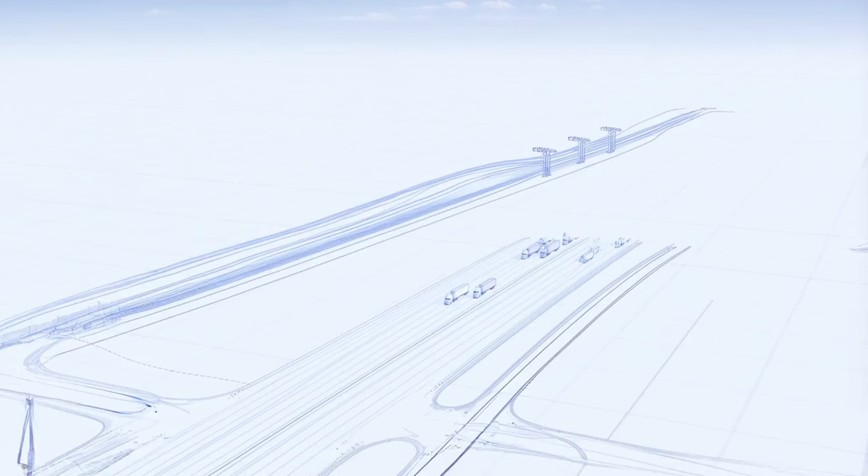The corridor was proposed in 2000, but went nowhere for two decades because nobody could agree on funding, routes, or who gets to profit. Then three things happened. First, China's Belt and Road Initiative made everyone nervous about Chinese dominance of trade routes. Second, sanctions on Russia after Ukraine made Moscow desperate for alternative trade connections. Third, India realized that if it wanted to compete with China economically, it needed better access to Central Asian and European markets. Suddenly, the INSTC went from a nice idea to a strategic priority.

The route works like this. Cargo ships from India sail to Iranian ports on the Persian Gulf, mainly Bandar Abbas or Chabahar. From there, goods move by rail or truck through Iran to the Caspian Sea. They cross the Caspian by ship to either Azerbaijan or Kazakhstan, then continue by rail through Russia to Europe. The project involves upgrading thousands of kilometers of railway, building new ports, improving customs infrastructure, and creating standardized procedures, so cargo doesn't get stuck at every border for weeks.

It's less a single mega project, and more a massive coordination effort between countries that historically haven't been great at coordinating. Iran is the linchpin. The corridor doesn't work without Iranian cooperation, which makes Western countries nervous. India is investing heavily in Chabahar port specifically to have a trade route that bypasses Pakistan, their longtime rival. Russia sees the corridor as a way to maintain economic relevance, despite being increasingly cut off from European markets. Azerbaijan and Kazakhstan are just happy to be included and collect transit fees.

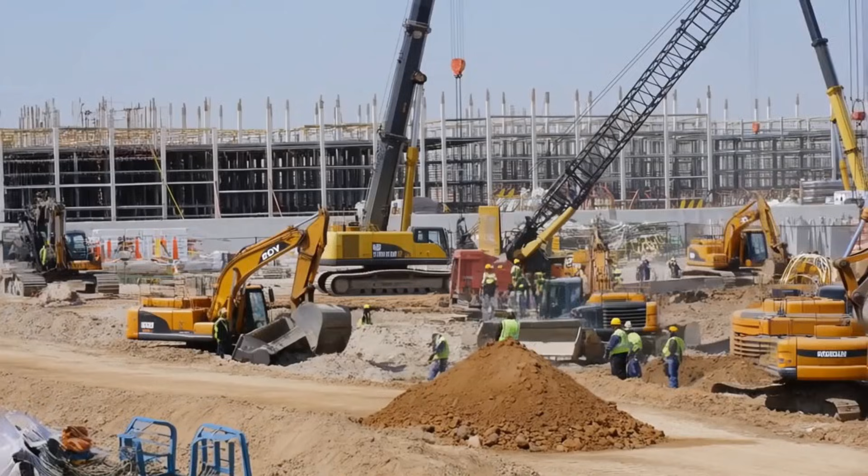The economic potential is enormous. The corridor could carry up to 15 million tons of cargo annually once fully operational. That's a significant chunk of India-Europe trade. It also gives landlocked Central Asian countries better access to global markets, which could boost their economies significantly.

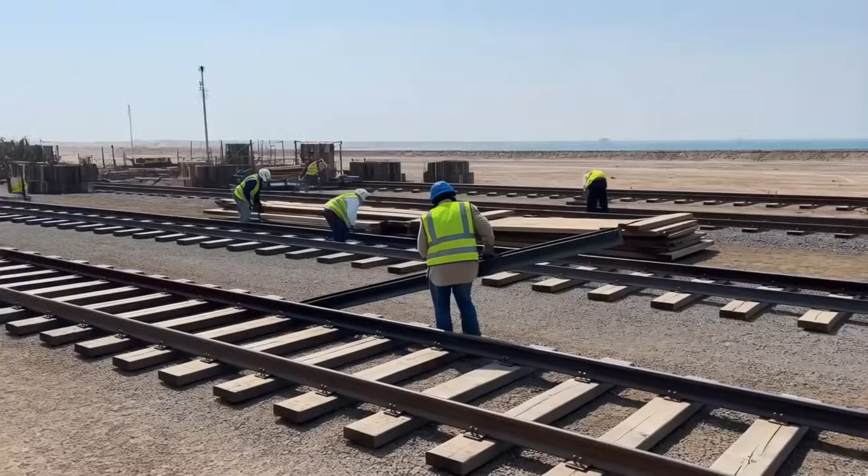Construction is happening in pieces. India has invested over $500 million in Chabahar port. Russia is upgrading its rail networks. Iran is building new railway connections to the Caspian. But the full corridor won't be complete until at least 2030.

The geopolitical implications are huge. This is India's answer to China's Belt and Road. It's Russia's lifeline to the global south. It's Iran's chance to become a transit hub instead of a pariah state. And it's a nightmare for anyone who benefits from the current Suez Canal route.

Will it work? That depends on whether these countries can actually cooperate, whether sanctions on Russia and Iran ease up, and whether someone doesn't blow up a critical section for geopolitical reasons. But if it works, the INSTC will be one of the most important pieces of infrastructure built this century. It won't be as flashy as a mirrored city in the desert or as sexy as a fusion reactor. But it will move goods, connect markets, and shift the balance of global trade. And that's worth more than all the megaprojects combined.

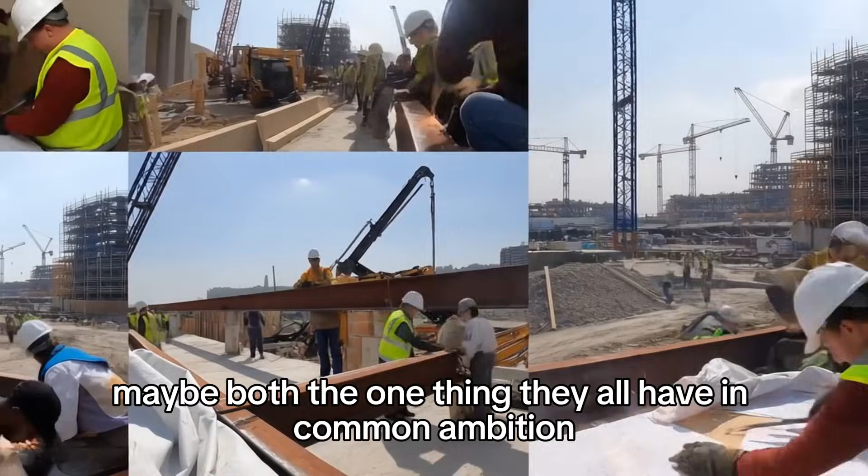So there you have it. Eight megaprojects that are either going to change the world or bankrupt the people building them. Maybe both. The one thing they all have in common? Ambition. The audacity to look at a desert, a mountain, or the laws of physics and say, yeah, we can do that. Whether they actually can? We'll find out soon enough.